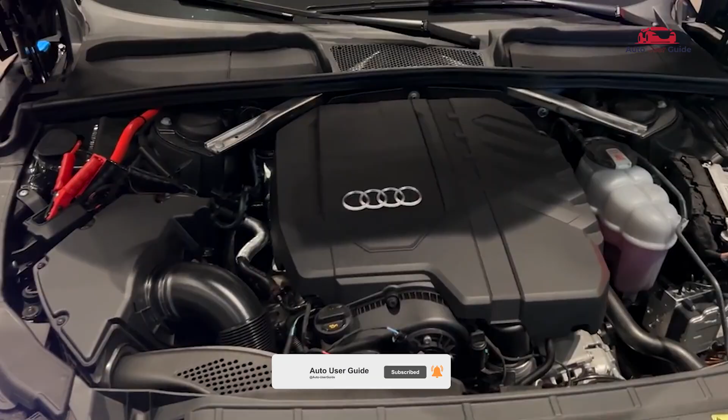Are you looking for the fuse box diagram and its exact location for your 2023 Audi A5? In this guide, we will help you easily locate the fuse boxes and provide a detailed diagram to simplify your troubleshooting process.

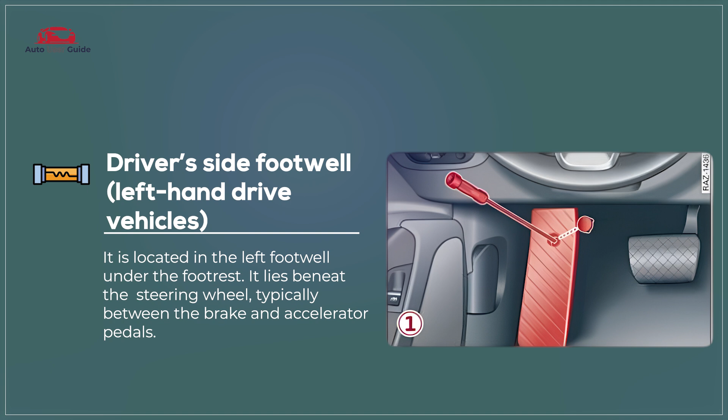Driver's side footwell, left-hand drive vehicles. The driver's side footwell in left-hand drive vehicles provides ample space for the driver's feet, ensuring comfort during long drives. It houses essential controls, including the brake, accelerator, and clutch pedals. The area is designed for easy access to foot-operated features like the fuse box.

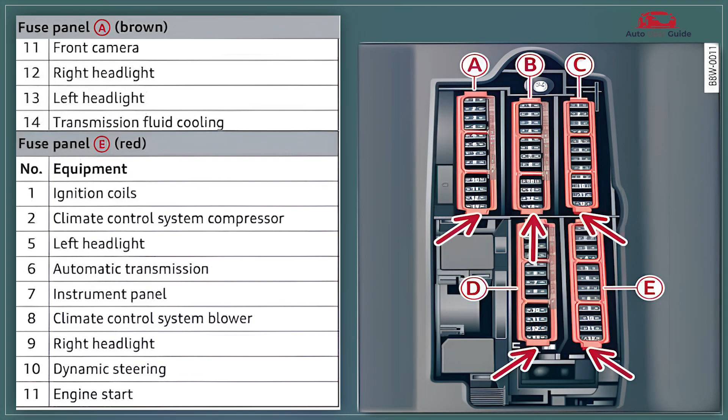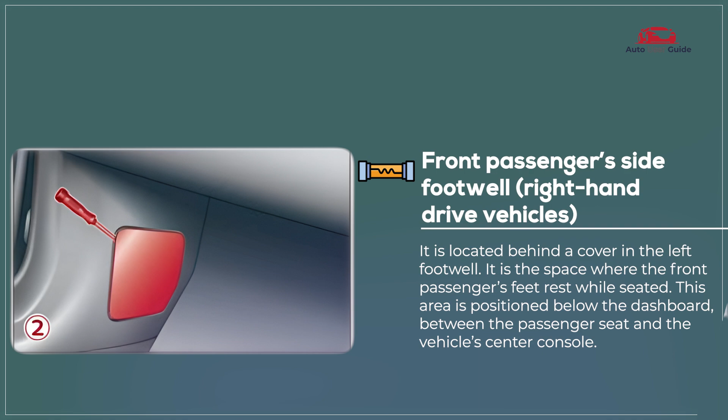Driver's side cockpit, left and right-hand drive vehicles. The driver's side cockpit in the 2023 Audi A5 features an intuitive digital display and a multi-function steering wheel for enhanced control. Premium materials and advanced technology ensure a comfortable and efficient driving experience.

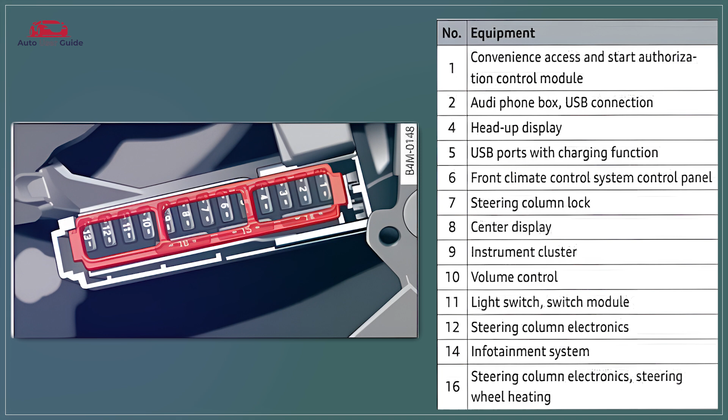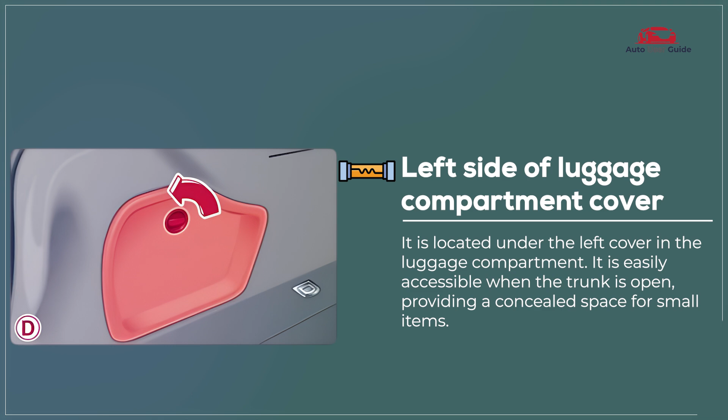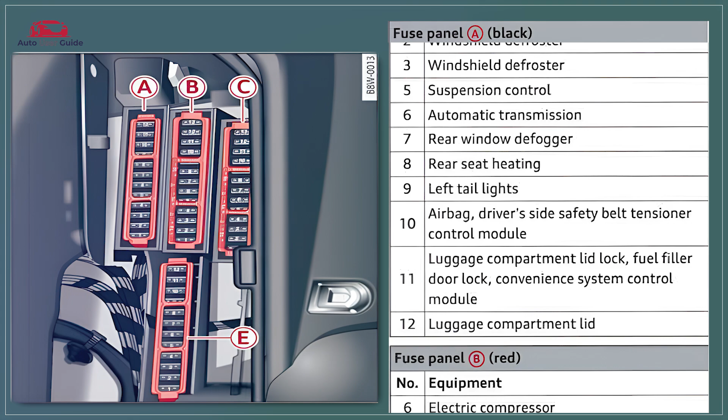Left side of luggage compartment cover. The left side of the luggage compartment cover in the 2023 Audi A5 offers practical storage solutions and convenience. It includes a small compartment for securing essential tools or accessories, ensuring they remain organized and easily accessible.

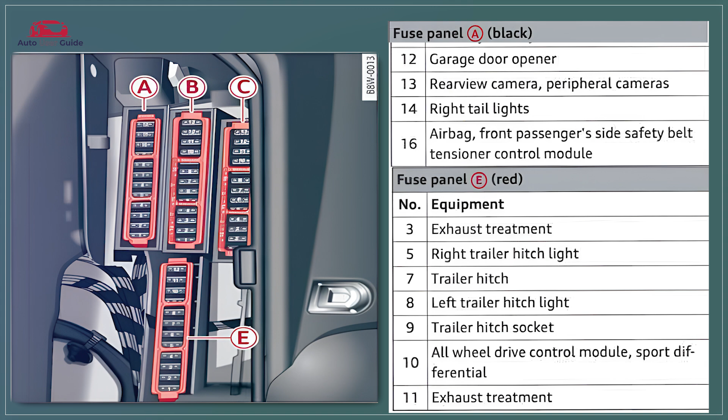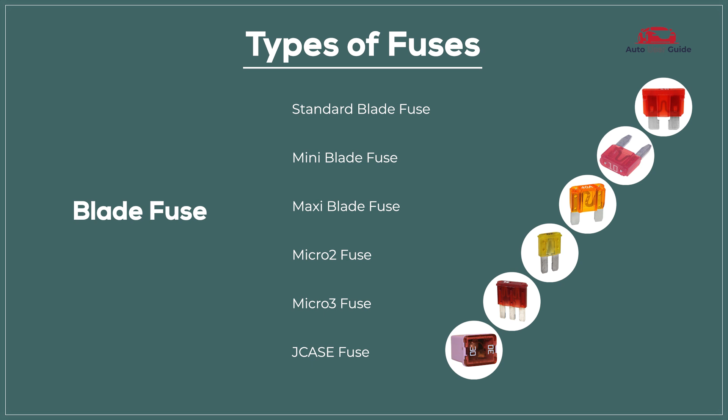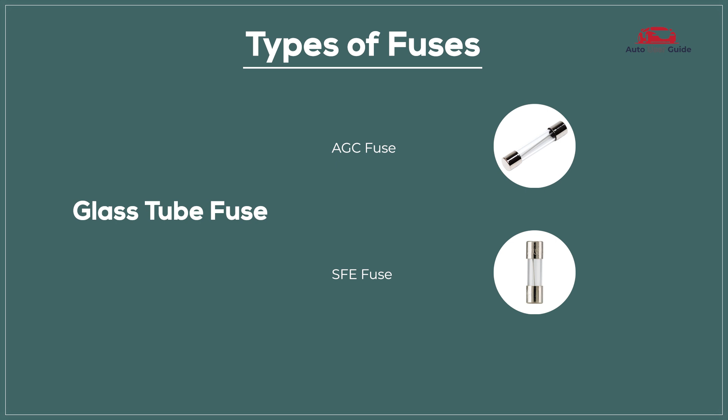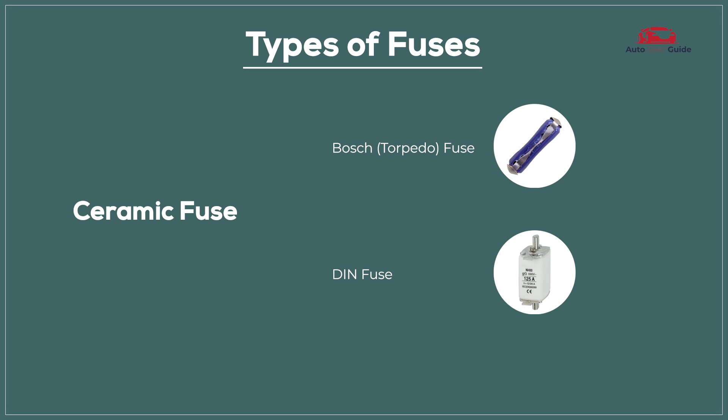Types of fuses: blade fuse, standard blade fuse, mini blade fuse, maxi blade fuse, micro 2 fuse, micro 3 fuse, J-case fuse, glass tube fuse, AGC fuse, SFE fuse, ceramic fuse, Bosch fuse, DIN fuse, PAL fuse, low profile PAL fuse, standard PAL fuse, link fuse, mega fuse, high amperage link fuse.

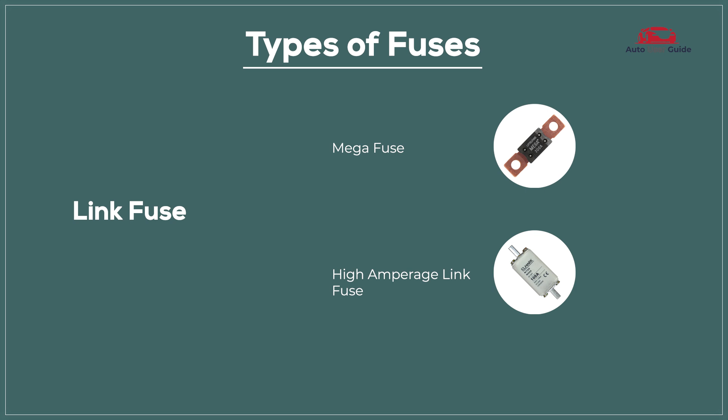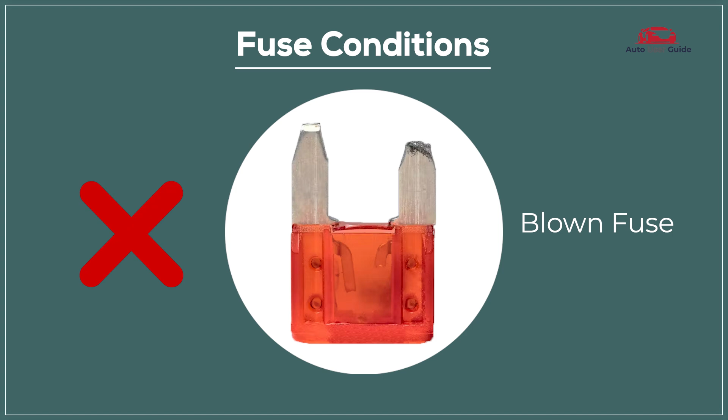Fuse conditions: blown fuse. A blown fuse means it's no longer functioning and needs replacement, while a perfect fuse is in good working condition and performing as expected.

How to change fuses: turn off the vehicle, locate the fuse box, identify the faulty fuse, remove the faulty fuse, inspect and obtain a replacement, install the new fuse, test the replacement.

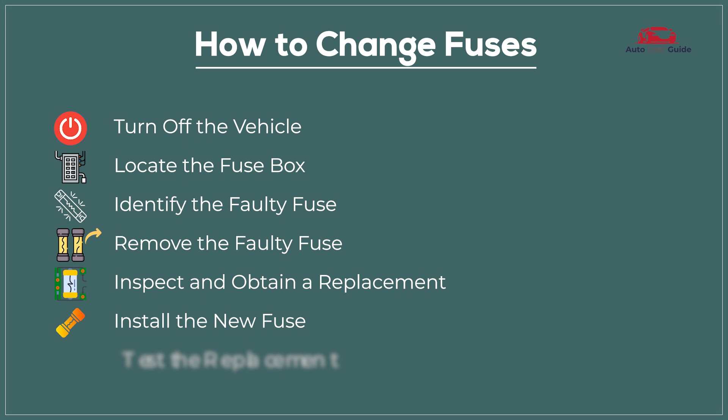Safety precautions: disconnect the battery, wear protective gear, use proper tools, check for correct amperage, avoid water exposure.